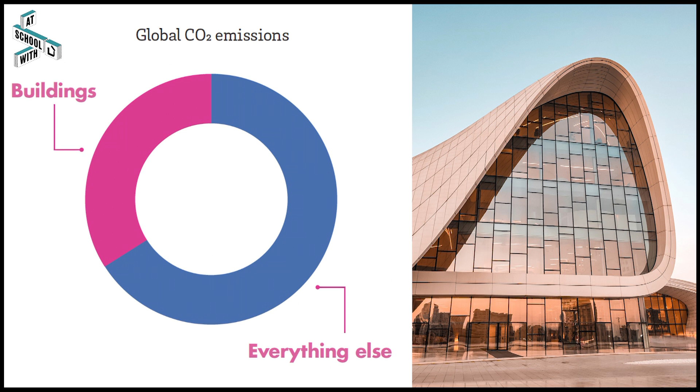So, how might this relate to the work that you do as a designer, in particular to the design of interior spaces? Building construction accounts for approximately a third of annual global CO2 emissions. It also consumes a large proportion of our material resources. Every building has an interior. Interiors are created or altered at greater frequency than the shell of a building, its structure and its core. This gives interiors significant impact in sustainable approaches.

You must understand that you, the interior architect and designer, will have a substantial effect on the way in which we manage our resources before, during and after a project. This material effect will include the implications of the interior's further replacement and its subsequent reuse as well. So in short, questions of circularity are the fundamental concerns in the designing and making of inside spaces when considering sustainable approaches.

Therefore, I feel it is very important to restate, as a designer of inside spaces, this is the opportunity for you to make a substantial and positive impact on the way in which we manage our resources through thoughtful and considered approaches to material sustainability. In order to help you with this, in this talk, I will suggest that there are 3 ways of describing how sustainability in materials can be utilised and understood.

They are: 1. Minimise embodied carbon. Embodied carbon is the most important single measure of sustainability. Embodied carbon is the value for the total greenhouse gas emissions resulting from the extraction, manufacturing, transportation and use and disposal of a material. Greenhouse gases are the primary cause of global warming and therefore a key contributor to the climate emergency.

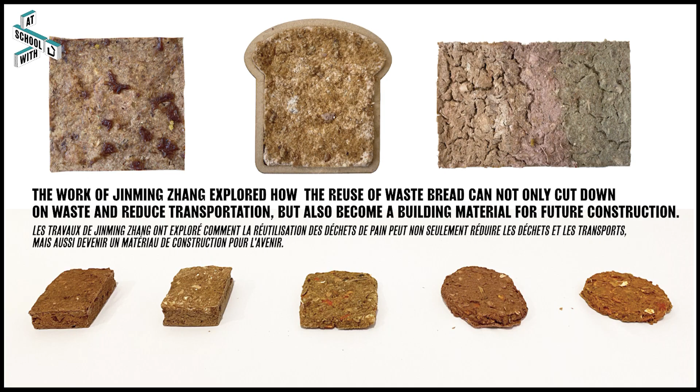It is well known that we must act quickly to reduce these emissions, and we can do that through minimising embodied carbon. For the interior, we must use materials with a low embodied carbon. Use less, waste less. Avoid secondary finishes. Reduce transportation. Design for durability.

Our second recommendation is we need to promote health and well-being. We spend up to 90% of our time indoors, inside the microenvironments we create. Therefore, humans are hugely affected by the quality of their inside environment. The materials used impact our physical and mental health. It is imperative that we design interiors that do not harm us. We should always design interiors that allow us to be safe and healthy.

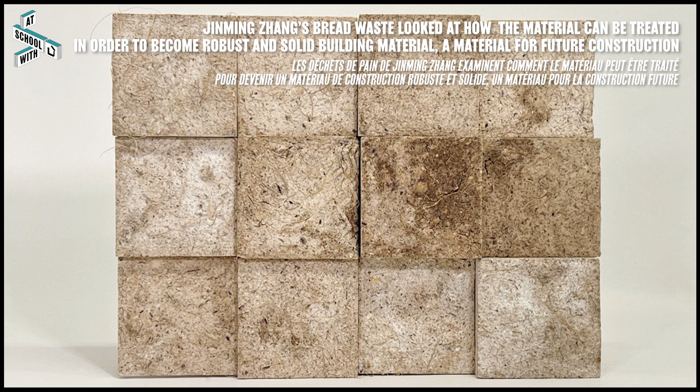So, now let's look at all three approaches to sustainability in more detail. I am going to describe how they relate to you, a designer, architect of the interior, with the view to helping you make some informed choices when you next think of the materials for your specific project.

What is embodied carbon? Embodied carbon is also known as the carbon footprint. It is the measure of greenhouse gases emitted as a consequence of creating and using a material product. This can include the emissions resulting from a material's excavation, production, transportation, assembly, installation, maintenance, replacement, demolition and disposal. Essentially, its whole lifetime. Embodied carbon is measured in carbon dioxide equivalent, or CO2e for short. CO2e accounts for the emissions of all greenhouse gases: carbon dioxide, methane, nitrous oxides and ozone. For ease, CO2 and carbon will be used as shorthand for CO2e in this episode.

Why is embodied carbon important? Embodied carbon is directly correlated with climate change. As a measure of greenhouse gas emissions, it is directly correlated to global warming and a major cause of anthropogenic climate change. Embodied carbon in construction is a significant proportion of global emissions, approximately 11% of total global carbon emissions. Reducing embodied carbon reduces our emissions today. It is widely accepted that the next 20 years are critical to avoiding the worst effects of the climate crisis. As embodied carbon represents upfront carbon emissions for buildings, this is what we must minimise to rapidly reduce our emissions.

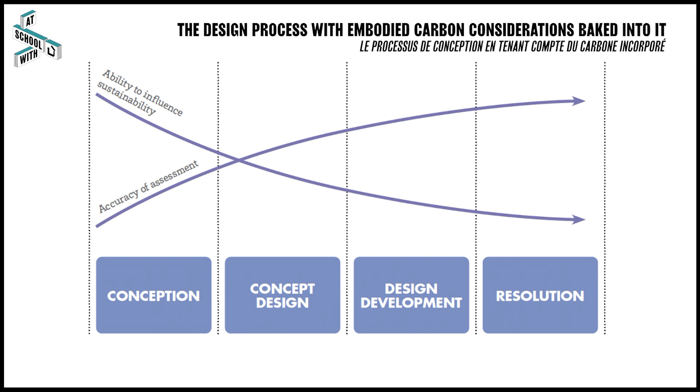How can we minimise embodied carbon? The general principles for assessing embodied carbon are: considering embodied carbon from the beginning of a project sets intentions and focuses minds. As a project develops, the opportunity to impact sustainability decreases while the accuracy of assessment increases. In order to help you embed these ideas in your processes, here are some tools that you can utilise. Let's start with the carbon budget. Quantifying a project's embodied carbon provides objective information that can be used to inform design decisions.

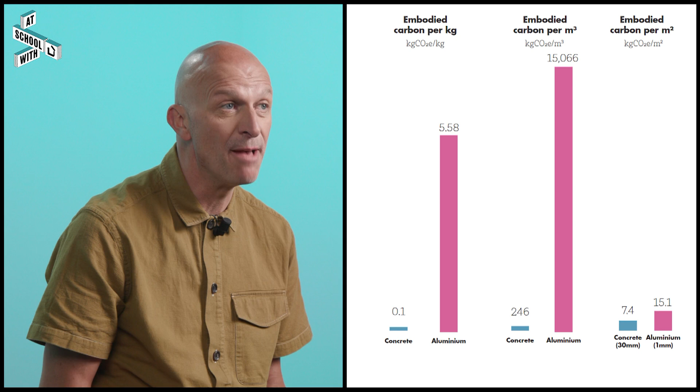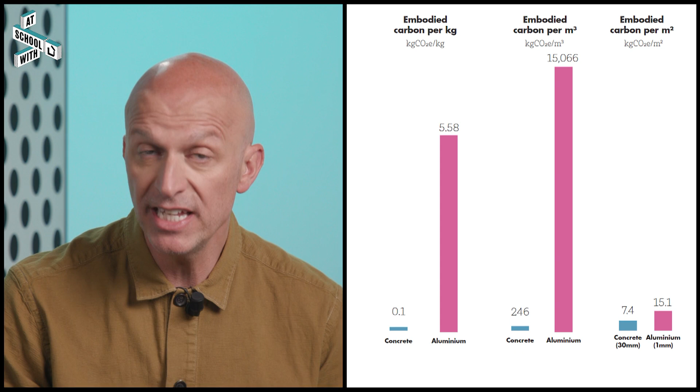To do this, a bill of materials, BOM, and a list of building elements and areas must be created. Multiplying the area of an element by the embodied carbon of its material gives us a measurement for each interior element, such as walls, floors, etc. Adding these values together gives an estimate of the entire project's embodied carbon.

Using this method to produce a carbon budget makes visible and clear the impact of design decisions. Of course, the level of detail depends on project ambitions, time, and of course budget. But go ahead, try a BOM in your next work. In the bill, compare materials using functional and relatable units. For example, marble isn't specified by the kilogram, but as an area or number of tiles.

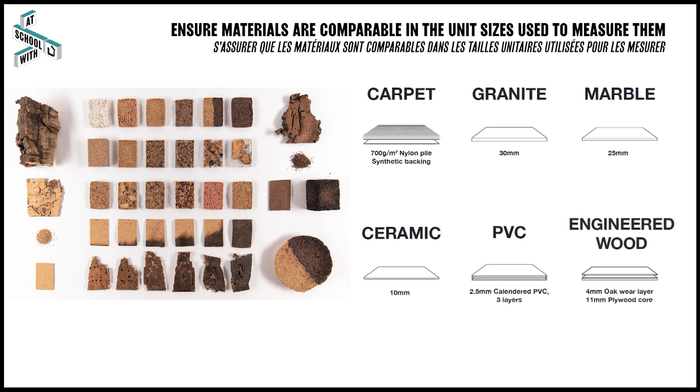To make useful comparisons, materials must be analysed in the forms and dimensions they are used. This is known as the functional units of a material. The majority of interior materials should be considered per square metre at a defined thickness. This then makes things easier for comparison in the BOM.

And finally, the other critical thing to do to get a realistic understanding of a project's embodied carbon, the full lifespan of the materials and elements must be considered. As interiors are made and used, they become a larger proportion of a building's whole life embodied carbon. Initially, the interior fit-out accounts for a relatively small, though not insignificant, proportion of a building's embodied carbon. 1/5 is a fair rudimentary approximation.

Don't forget, each time an element is reworked or replaced, there is an additional environmental impact. Therefore, it is really important to consider longevity and durability when designing and thinking through the anticipated maintenance and replacement cycle. Because of this, materials with a higher embodied carbon but longer service life may be justified when considered over the building's lifespan.

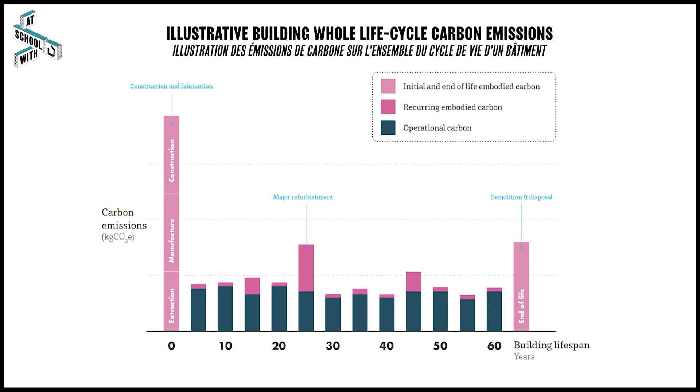Just to put this in context, this graph shows the carbon emissions for a 60-year lifespan of a building. The beginning spike is construction, the end is demolition. In between are the operational emissions, maintenance, and so on. The majority of emissions occur up front. This is why not only is building reuse important, but the minimising of carbon through carefully considered bills of materials and carbon budgets are essential.

Minimising embodied carbon has to be understood in the context of how carbon can be converted and stored. This conversion and storing of carbon as biogenic matter, that's plants to you or me, is known as carbon sequestration. Fluctuations in greenhouse gas concentrations and a changing climate is natural. This process has been occurring since the formation of Earth. That's about 4.5 billion years ago. What is not natural is the current rate of change, and this is directly related to human activities.

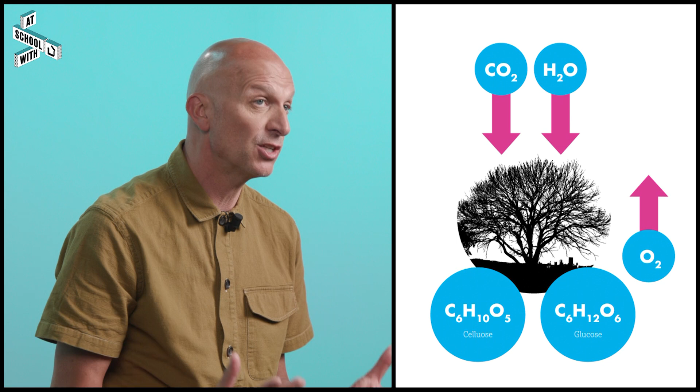The carbon dioxide content of the atmosphere is naturally regulated through the carbon cycle. Crudely put, the carbon cycle involves plants removing CO2 from the atmosphere, using the sun's energy in photosynthesis to convert CO2 into carbon and oxygen. The carbon is used to make the physical bodies of plants, and the oxygen is released into the atmosphere.

This is sequestration. We can use biogenic materials that reduce atmospheric CO2 and turn buildings into storers rather than emitters of carbon. Certain materials are excellent for sequestration if managed correctly. Thus, they can also be carbon negative and thus subtract in your bill of materials and the total embodied carbon calculation. Handy for your project's sustainable credentials.

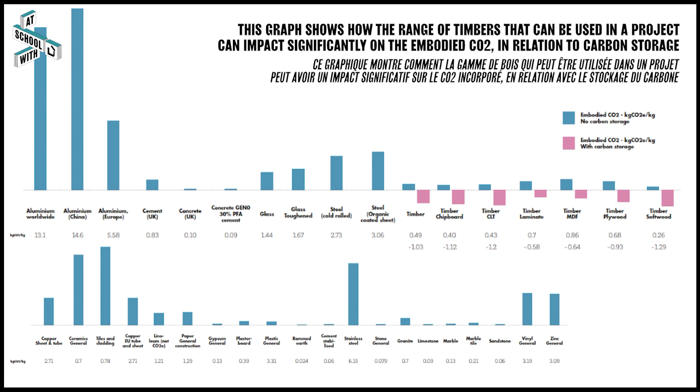Trees are the lungs of the planet and the Earth's foremost sequesters of carbon. Harvesting trees and replanting them at a sustainable rate is the most effective method we have of removing CO2 from the atmosphere. Europe's forest cover has increased by 800,000 hectares every year since 1990, and only 64% of annual growth is harvested. The amount of wood available in Europe is growing continuously.

In Europe, the standing volume of forest is growing by 700 million cubic meters every year, almost the equivalent of the wood needed to build a single family house every second. This means that very little timber needs to be imported into Europe, with over 97% of softwood and over 90% of all wood used sourced from indigenous forests. Trees, they are amazing. Carbon negative materials.

Where to find embodied carbon values? The other place to look to offset or find carbon negative materials is in their transportation to site.

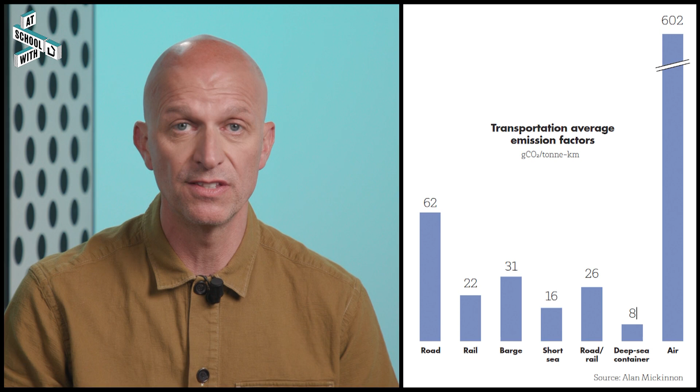If not thought through, this can lead to further carbon emissions. Differing modes of transport emit different levels of CO2, and larger distances lead to more emissions. Using locally sourced materials not only reduces transportation emissions, but it also connects a project to its surrounding environment. Combining and comparing the embodied carbon and transportation emissions of materials provides an accurate picture of the carbon impact.

To help you with more information about your project, take a look at EPDs. EPDs are the best source for accurate embodied carbon data for specific products. EPDs are the documentation of a full life cycle assessment, an LCA, carried out to international standards and validated by a third-party organisation. EPDs give very precise information about the impact of products and can be used to make detail-level decisions. Within EPDs, the key metric we are looking for, embodied carbon, is listed as global warming potential, GWP. As always, check what unit is used for the calculation of GWP, embodied carbon.

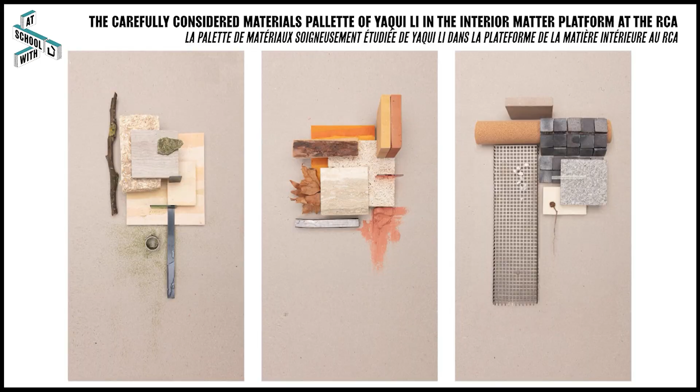Look them up. So, to conclude this part, minimising the embodied carbon of a project is vital to how the material sustainability of a project can lessen its environmental impact. Next is how we can promote health and well-being through material sustainability. Our efforts to minimise carbon emissions and conserve resources are to ensure the long-term survival of people on this planet. As well as this ambition, it is important to also zoom in and consider the day-to-day experiences of individuals.

It is proven that we are deeply affected by the quality of our environments, in both body and in mind. Spending up to 90% of our time indoors, it is clear that the design of our interiors has a significant influence on the quality of our lives. What are the material aspects of health and well-being? There are three primary drivers of health and well-being. They are physical health, physical comfort, and psychological comfort.

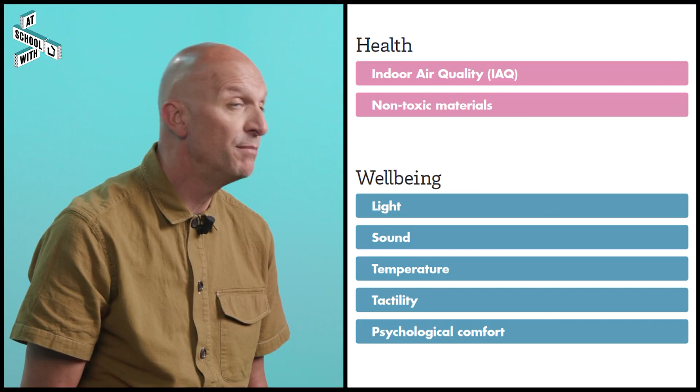On this basis, it is a priority that the design of interior spaces must avoid materials that are toxic or harmful to our health. Protecting physical health is the most important factor. Aspects of comfort and experience are what we will consider as well-being. Materials impact health and well-being through a number of mechanisms. The major elements of these effects are material explicit.

So, what are healthy materials? The potential harmful effect of materials has long been recognised as a problem. The now outdated term sick building syndrome has been in circulation since the 80s. Poor health can be attributed to many factors. The complexity of human health, combined with the intricate assembly of a building, makes it challenging to pinpoint exactly the causes of negative health related to interiors.

Many of the products we use in our buildings are still, to some degree, toxic. These materials are not chosen out of malice, but for the exceptional performance or low price that they might provide. Regardless of this difficulty, the evidence of the hazardous nature of certain construction materials is extensive and compelling. We now know enough to do better.

As an approach to sustainable, healthy materials, it is safest to adopt the precautionary principle, as originated by the Science and Environmental Health Network. If there is a serious concern about a material, even if reliable scientific information still leaves some doubt, it is prudent to avoid the risk and seek a safer alternative. Fortunately, today, there are many materials and technologies available that are very low risk and use virtually no hazardous chemicals. So there are many alternatives out there. Seek them out.

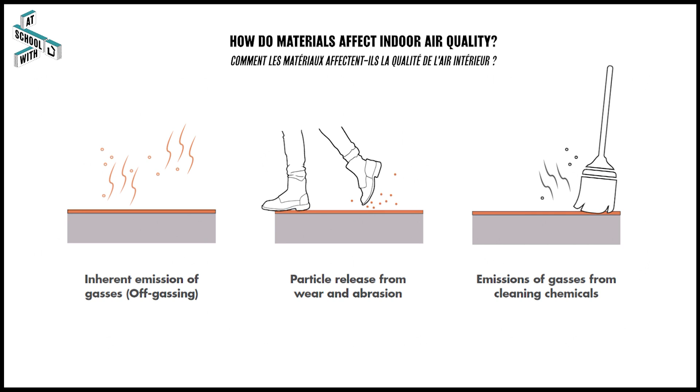From the three primary mechanisms by which materials impact IAQ, off-gassing, particulates and cleaning chemicals, it is off-gassing that is the primary concern. Off-gassing is the term used for when a material releases a chemical, especially a harmful one, in the form of a gas. When used in the context of interiors, off-gassing relates to materials releasing gas as part of their everyday use, rather than as a reaction to temperature or contact with a chemical.

Remember our volatile organic compounds, the VOCs? Off-gassing is commonly the consequence of materials containing VOCs. They are the organic chemicals that readily vaporize at room temperature, meaning those substances become gases that can be inhaled. VOCs include a wide range of organic substances, the majority of which are harmless.

For example, essential oils are a VOC. They vaporize and we enjoy their aroma. Candles too. However, there are a number of VOCs that do cause short and long-term adverse health effects. And sadly, many of our building materials contain these harmful VOCs. The smell of fresh paint is a toxic VOC that almost everyone is familiar with. With this understanding, we should avoid using materials that release harmful VOCs.

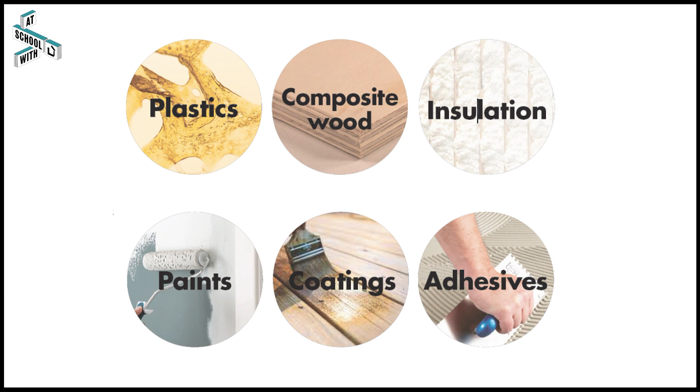VOCs are prevalent within many interior products. VOC chemicals are used as feedstocks for plastics and in binding resins for products such as composite wood or insulation. They are found in paints, coatings, adhesives, and protective treatments. Therefore, even products that don't inherently contain VOCs often gain them through products used to treat or install them. For example, when concrete is sealed or ceramics are fixed.

VOC emissions are often related to the curing or drying of products, such as paint. They are emitted at high levels when first installed and taper off to lower levels over time. Building materials wrapped in protective plastic at point of manufacture and unwrapped at the project site can emit concentrated VOCs when uncovered. VOC emissions from solid materials such as flooring, fabric, furniture and furnishings are initially released at a slower pace and maintain a low level of emissions over a longer period of time.

VOCs include a wide range of chemicals which are typically measured collectively and communicated in technical data sheets as TVOCs, or total volatile organic compounds. Some manufacturers do list chemical ingredients separately in their technical literature. The most common VOCs of concern are present in building products and indoor air; products known to contain these chemicals in anything more than trace quantities should be avoided as part of the precautionary principle.

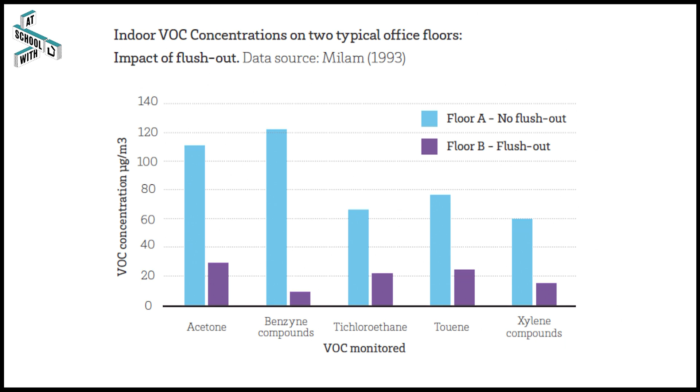This chart shows the results of a study measuring the amount of gases present with and without flushing. An office with identical installations over 2 floors was measured for VOC concentrations. Floor A wasn't flushed, whereas floor B was. The difference is clear, with a significant reduction in the flushed floor. Why indoor air quality matters.

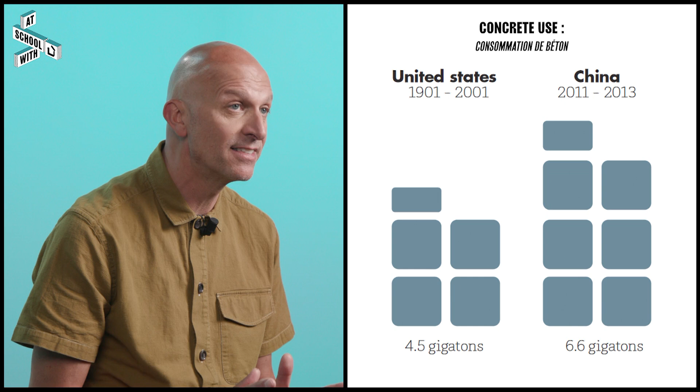And this only considers concrete use by China. Appraise all global material use and the picture is alarming. Globally, human activity moves more soil, rock and sediment than is moved by all other natural processes combined. Our rate of material consumption is the dictionary definition of unsustainable. We must change the way we consume and make things.

First to consider is what is known as the circular economy. Circular economy principles propose moving away from the existing system of take, make, waste, and instead adopting a system of take, make, and make again and again. Reusing existing resources to make new products in a closed loop. A circular approach. Design has an important role to play in the success of this circularity.

It is commonly stated that 80% of environmental impacts are locked in at the design stage. True or not, the idea is worth considering. Designers can ensure that negative impacts are minimised in the creation of buildings and that their materials are able to be recovered, recycled or reused at the end of their service life.

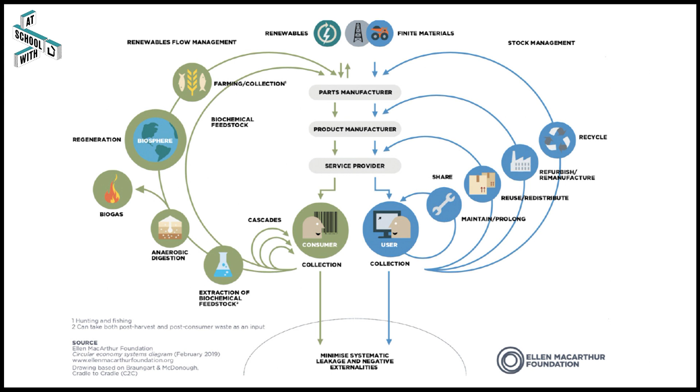Biological resources are materials that grow using biological processes. They are renewable. Through biodegradation, the nutrients required for new growth are returned to the soil. Biological resources are considered renewable. They are materials that can be used endlessly if replenished at a greater rate than we extract them. It is imperative to use biological resources in a way that their nutrients remain in the biological cycle at the end of their lifespan.

Technical resources are materials, often synthetic, that don't form by growing. They are non-renewable. There is a finite amount of these materials on planet Earth. Despite their finite nature, we use technical materials in a way that they are unrecoverable, and thus they become lost to us. To avoid depleting the planet's finite resources, we must recycle and reprocess non-renewable materials, keeping them in the technical cycle. This requires things to be made in ways that ensure that their ingredients can be recovered and the material qualities kept high.

One of the fundamental rules of circular design is to keep materials within their cycles. Technical and biological nutrients should remain so. Too often, technical and biological nutrients are irreversibly bonded to each other, so that they can be neither biodegraded nor recycled. Cradle-to-Cradle co-author Dr. Michael Braungart calls these monstrous hybrids. Monstrous hybrids are lost from both cycles. At best, they are repurposed for a lower quality application and eventually discarded. This must be avoided. As a designer, select only products that can be separated into their fundamental cycles.

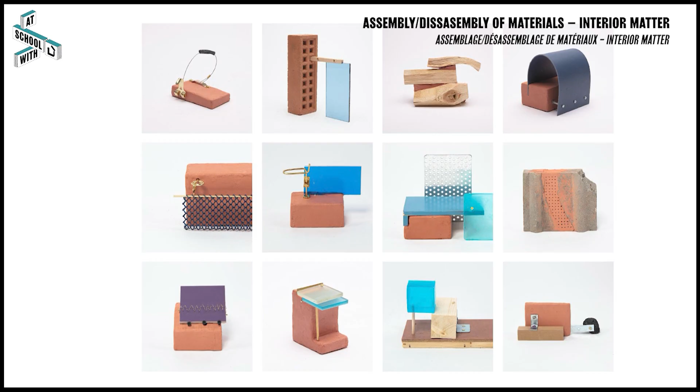Design for disassembly. DFD for short. Buildings should be designed to be disassembled with the same care that is given to their assembly. Materials must be able to be separated and repackaged for reuse and recycling. To achieve this, design must use materials that can be readily recycled or biodegraded. Avoid inseparable composites to maintain material purity for reprocessing. Mechanical fixings are favoured over adhesive fixings, and information on what resources are within a building should be retained.

This is where material passports come in handy. The Belgian company Rotor are very good at this. They take buildings apart and reuse them in numerous ways. This is them taking apart Antwerp City Hall for a new project.

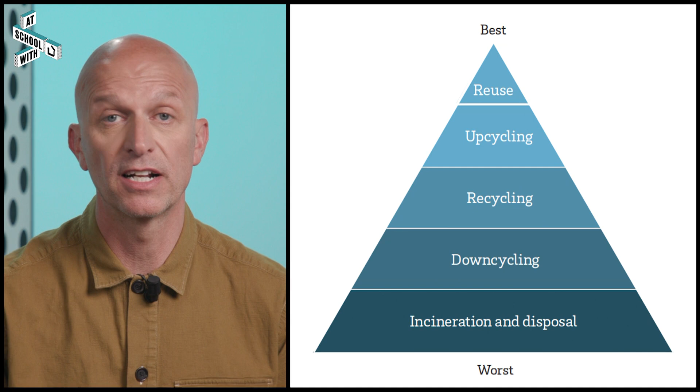End-of-life hierarchy. Finally, at the end of a product's useful life, there is a clear hierarchy for how it is reused. The less reprocessing required, the lower the environmental impact. Reuse involves reusing a material in its current form with minor changes. Upcycling is reprocessing a material for a higher quality application. Recycling is reprocessing a material, maintaining its original quality, allowing it to be used for an equivalent application as its previous life. Downcycling is reprocessing that reduces material quality, leading to a lower quality application.

A key idea in end-of-life scenarios is to maintain material quality. Design in a way that materials can be recovered and recycled for an equivalent or better use.

So, to conclude, this episode has explored how we might minimise embodied carbon, promote health and well-being, and conserve resources, all in order to make the design of our interiors more responsive, thoughtful, and better designed in relation to our impact on the world and its resources. Now it's over to you.